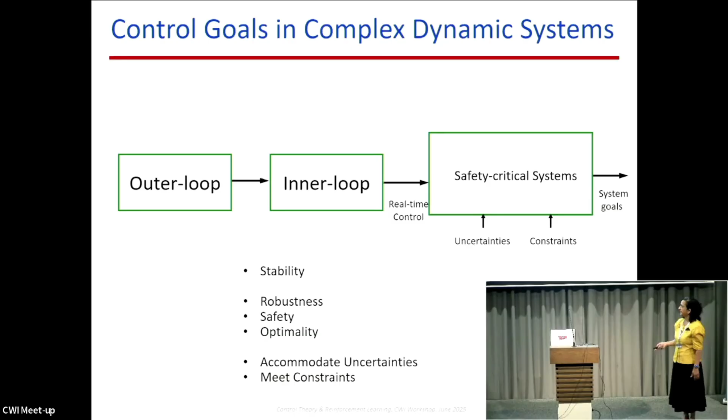You have to really stay within certain limits. The temperature cannot exceed a certain value. The current cannot go beyond a certain value, et cetera, et cetera. And this has a very long history. In fact, we can trace it all the way to the water clocks of the Greeks and the Chinese.

And in fact, I heard a talk recently about how James Watt basically was fundamentally responsible for the Industrial Revolution. And it so happened that some key individuals met. And because of that confluence came this engineering marvel, which is a substrate for all of the power grids, the electricity that you and I get. And so he, again, designed one of the first feedback control systems that sort of sets the stage for having this become a systematic engineering discipline.

And since then, there has been a whole bunch of applications, aerospace, process control, to just name a few. And these are some of the success stories that we put together in this report, not just physical systems, but cyber physical systems, meaning that there is more and more of a need to monitor these things, sense them, communicate the information through a variety of communication layers and devices, and of course, do the computation as quickly as possible and actuate it so that you can indeed design the real-time control. So it's really a nexus of the cyber and the physical worlds.

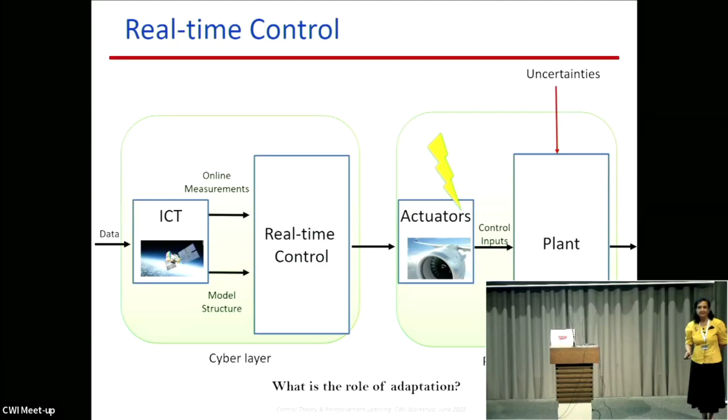So the basics of this basically is all about provably correct algorithms. And what are you trying to learn? So something went wrong, right? So that's what I'm calling as a parameter. And this is where some of the elements, you can probably see when you parameterize a Q-learning using neural networks, the weights could be these parameters.

So these parameters, but here, in the context of what I'm talking about, this theta is a physical quantity. Like, for instance, what's the effectiveness of what the actuators provide to an airplane that allows the airplane to turn, to maneuver. So if that is something that is uncertain because you've got some kind of a loss of effectiveness in the actuator, then that's what you're trying to learn in real time. But at the same time, you're also trying to figure out how to deflect those surfaces in a way so that you're able to improve the performance.

So that really is what adaptive control is trying to do. It's trying to learn, and don't worry about the details of why it is specified as a differential equation. It's just for analytical tractability. And how do you design the control input, which could be, for instance, a force or a torque or a heat and all that, like I mentioned to you. And how do you do these things with some sort of guarantees? That really is what adaptive control is all about. And adaptive control, too, just like control systems, has a history of more than 60, 70 years.

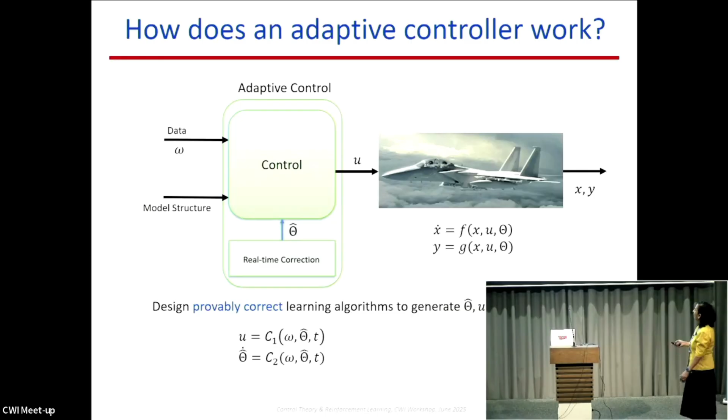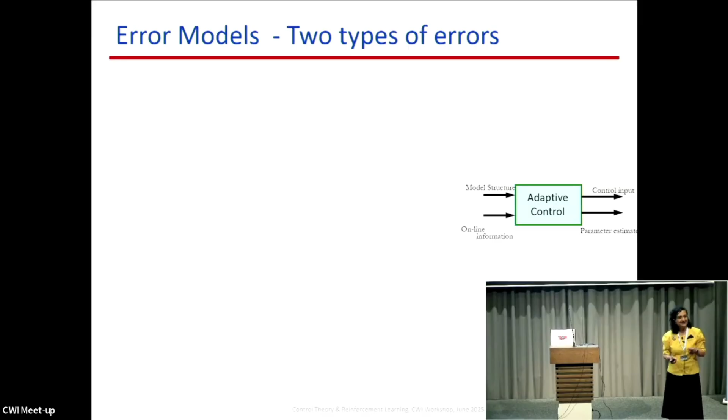So in all of these things, and here is where maybe there are more parallels that begin to emerge between RL and adaptive control, there are two kinds of errors that we always contend with. One is like, for instance, a loss function type of thing. And that is what we call in here a performance error. So E squared, or some kind of a positive definite function of E. The other is where you need to be. So for instance, if you're training the weights, where the weights need to go to, minus what you have in here. So that's a parameter error. So this is what you can measure, and you need to reduce it, and this is what you can adjust, but you don't know what it should be. So this is the learning rule.

And so how do you then design the rules for adjusting the parameter so that this performance error goes to zero? So this too, you can see, brings in some parallels to the kinds of things that you worry about in the context of, say, back propagation error. So how do you determine the error model, the one that relates the parameter error to the performance error, and the rule for adjusting this parameter is really what it's all about, right?

So if you take a very simple linear regression problem, again, something that is quite familiar to you. If you take a linear neural network, that really is what it is. So let's assume that that's really your system model. So phi is basically some underlying regressor that determines the system. So with that, you build an estimator that looks like this, because you use what is known as a certainty equivalence idea. So there is a performance error and there is a parameter error. In this particular case, it turns out that the parameter error and the performance error are really related by a very simple linear regression equation.

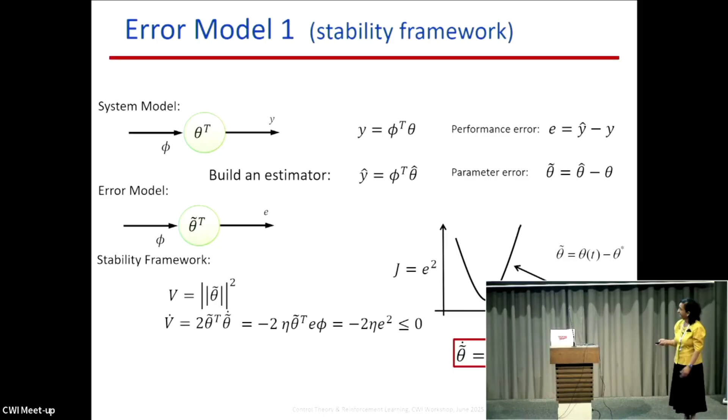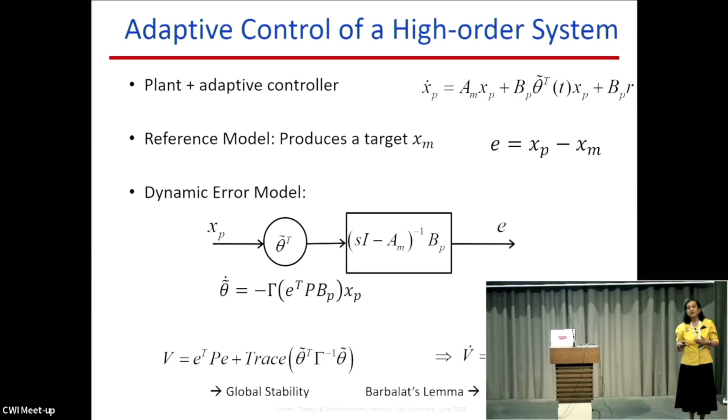So you can take the same idea now. Nothing is going to be a linear regression. Nothing is going to be in low dimensions. And so you do need to worry about the scenario where you have multiple states. All of this is essentially saying even when you increase the order of the system, you can still have a rule of how to adjust a vector of parameters. And you can still look at something like a positive definite function and show that everything is well behaved. And you can rely on some real analysis arguments of continuity, differentiability, and well-behaved norms in order to show that the error goes to 0.

And you can also look at the equivalent of POMDP. So you only have partially observable systems. For instance, there are multiple states. This is, again, a dynamic operator in here. So you have a lot of states hidden in the system, but you can only measure a part of them. So you then come up with some kind of an observer, which also doubles as a controller.

These are filters that generate these states, which end up being estimates of the actual state. And because these converge very quickly to the actual states, you're able to get a nice, stable adaptive control architecture that tells you how to go about determining an adaptive control input. I'll come to learning a little bit later.

Okay, so that again gives you stability. So you can see, as I mentioned before, the focus is on stability because when you are making these real-time changes and trying to figure out what the actual parameters are, you want to make sure that nothing runs away and you have a stable foundation, so we worry about stability.

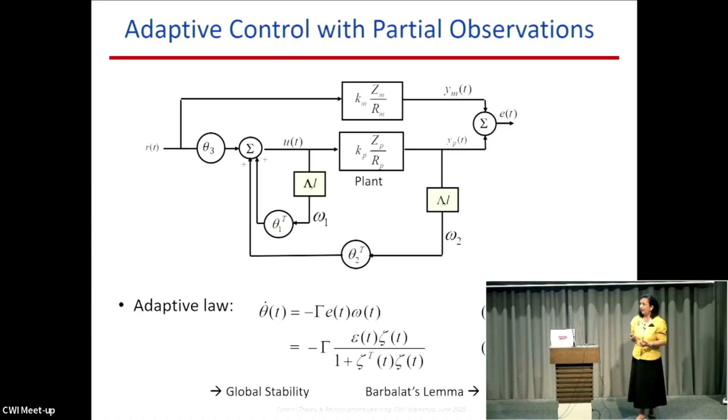The other departure, which I'm sure you have noticed here, is that the treatment of everything I'm talking about is deterministic. It's not stochastic. We haven't really brought in any kind of stochastic random components. But that doesn't mean that this is only restricted to deterministic systems. The way in which many of these models proceed is that the stochasticity is relegated to, say, measurements. So if you have measurement noise, then that brings in stochasticity. There could be disturbances, wind gusts, and so on. And that is looked at as a stochastic problem.

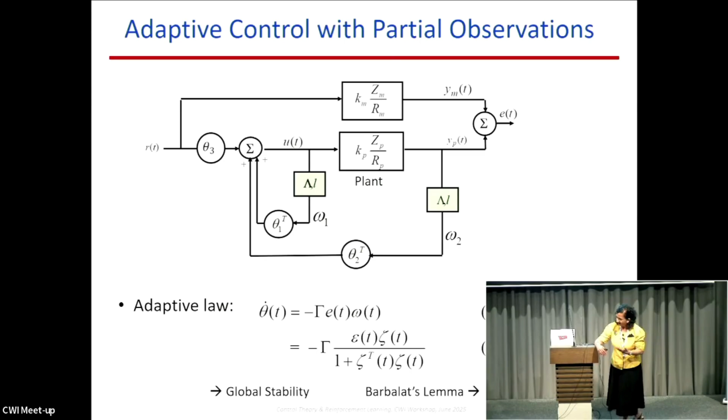And the other thing that you would have noticed is the treatment here is in continuous time, because these are analog quantities. A robot has a position and a velocity at every instant of time. The world doesn't progress in discrete chunks, so it's an analog world. And so continuous time descriptions of these systems are a more natural vehicle, and a lot of these things do proceed in continuous time. That doesn't mean that we cannot do all of these things in discrete time. There's a whole discrete time systems analysis, Lyapunov functions for discrete time, adaptive control for discrete time, all that exists, but I'm just not going into that right now. But you can infer that there are indeed many of these parallels.

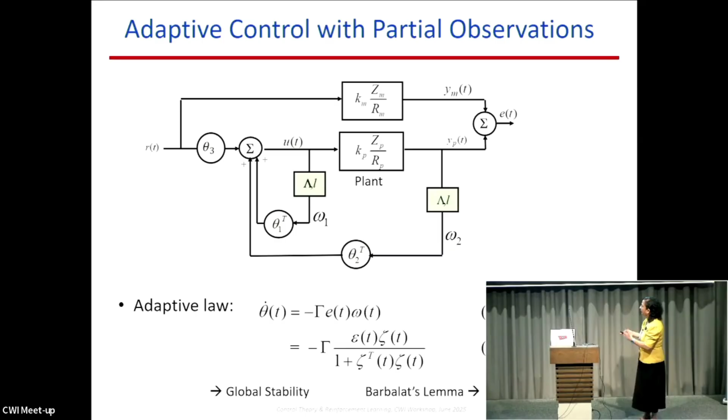Everything that I've talked about so far has looked at linear dynamic systems. Nothing in this world is linear. It's always going to be nonlinear. And so if you now have a known nonlinear system, then you can make some headway if you know something about these nonlinearities. For instance, in all of the problems, what you're looking at is a description of a physical system. Again, to come back to an airplane type of story, we know many of the underlying mechanisms that contribute to the motion of an airplane.

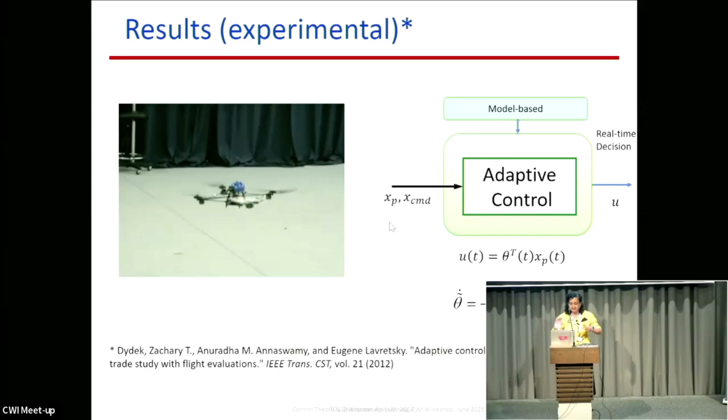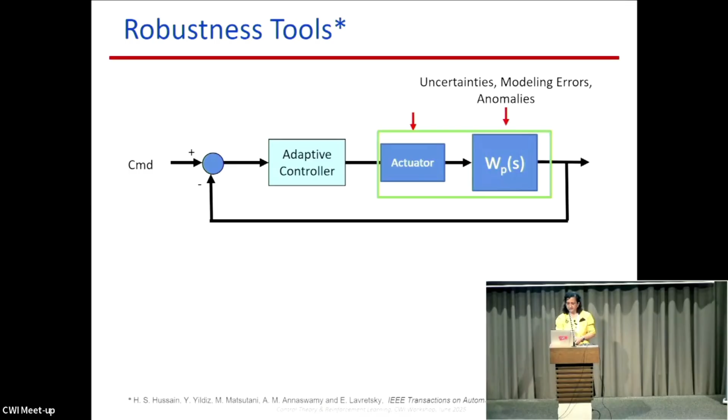So we don't really work on drones in our lab, but our goal was really trying to establish what adaptation can do. And so this was the simplest experiment that we could think of that basically emulated a real-time uncertainty in mid-flight. And that's what Zach was very clever at and was able to show that it works. So that illustrates what you can do. There's a lot more videos, but I didn't bring all of that in here. So that gives you an idea that these are hardware demonstrations of the concept.

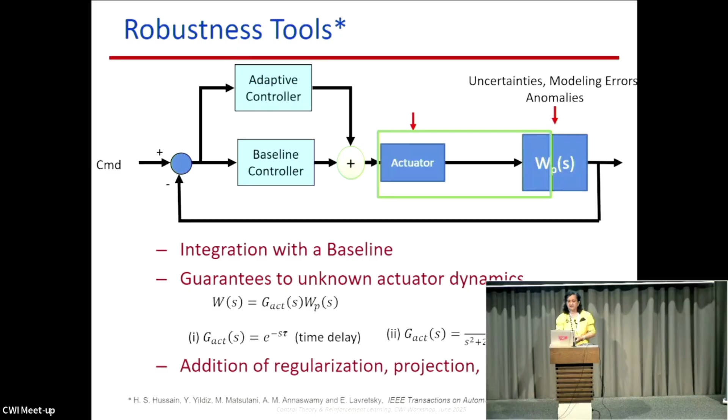So now the next thing here is that there are a lot of uncertainties beyond parametric uncertainties that can happen. And so we basically introduce other kinds of anomalies, like uncertainties in terms of not just parameters, but also input saturation uncertainties, unknown actuator dynamics, unmodeled dynamics. And in all of these cases, we can show that by using notions of regularization, which is, again, a tool that is used in RL, we can actually provide some guarantees. Projection, which is, again, a notion which is a commonality.

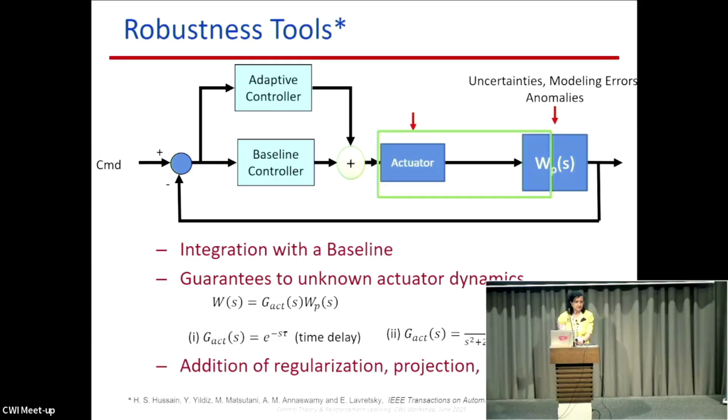Sometimes we also look at the notion of a dead zone, which is that when you are uncertain and when your magnitudes are of an insufficient quantity, you don't know whether it's due to noise or due to actual data, so don't even do any kind of adaptation. So that's the dead zone idea.

So we want to also look at another kind of constraint, another kind of property that's always present in a dynamic system, and that is input saturation. So you have a limit on the control authority as to how much force you can put in, how much torque, et cetera. And so we wanted to make sure that indeed we can carry out our adaptation even when there is input saturation.

And so what we did was to really show that in many cases, you can model the effect of saturation as an additive disturbance. And by modifying the performance error suitably, we were able to show that indeed we can accommodate. And it really started with Karason, who came up with some of the main algorithms. And subsequently, we have developed it and implemented it in practice in a variety of applications. And it actually has worked very well. So here is one example.

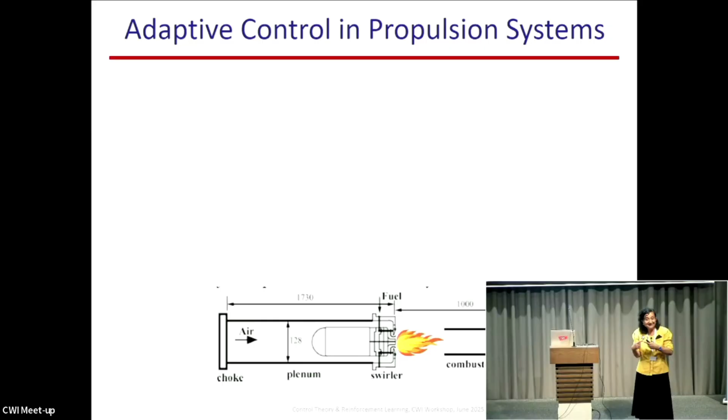So this is a problem in a gas turbine system where there is interaction between heat that is coming from the fuel that you're mixing with air and burning. And that chemical energy transforms into this huge mechanical energy, and that's what goes into the turbine and gives you thrust. But interestingly enough, the heat that's coming from the chemical reaction, from the reactant to the product, and the acoustics that are in the chamber get coupled. And when that happens, there is a huge acoustic resonance.

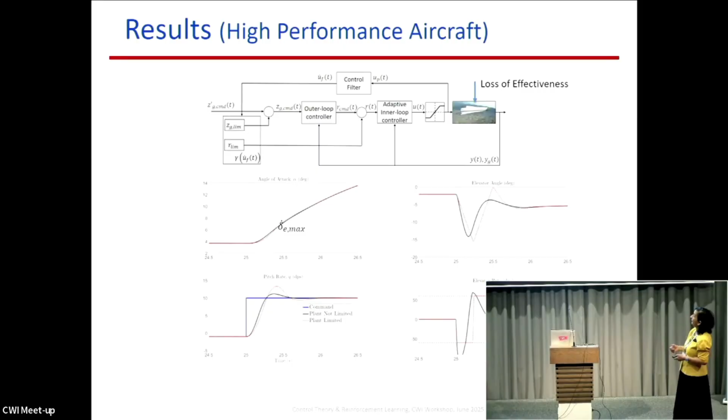Here's another example. This is simulation, but of a hypersonic vehicle. And here, we were not only worried about magnitude saturation, but we were also worried about rates, like how quickly you can actually increase this. So it turns out that if you want to really follow this particular command, you have to have a huge amount of rate, which is really not realistic. So the algorithm that we designed with all of these different kinds of processing of components was able to limit the rate, but still realize the performance, which is reasonable.

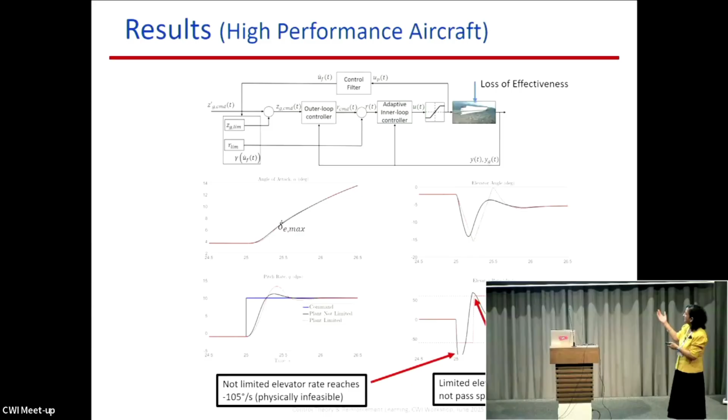So yes, there is some departure from the performance, but eventually you're able to follow the command. But the black is simply not realistic, and what we were able to do is to come pretty close to what we're trying to do. I think this is also one of the questions that I was asking you yesterday about multiple objectives. If you have this significant trade-off, you want to have the best of both worlds, and this is the one that enables you to realize that.

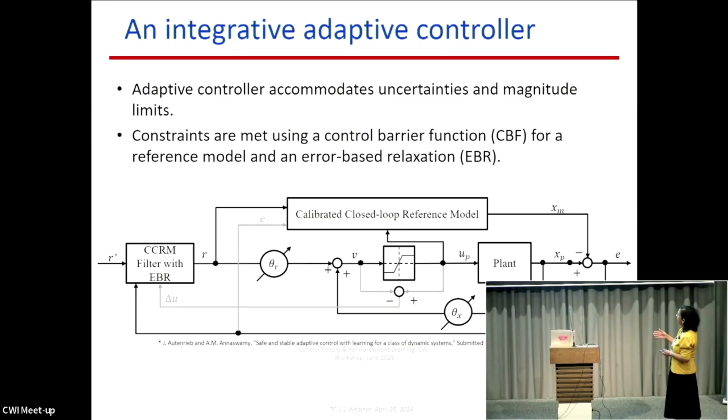Yet another type of constraint comes from safety. So not only do you want to make sure that you have the inputs subject to some constraints, but you also want the states to remain within a certain region. And how do you make sure that you can combine whatever you're trying to do in terms of performance and safety? So this is the next set of things that I want to show you. This is in collaboration with people in DLR in Germany. And so here is a very simple example.

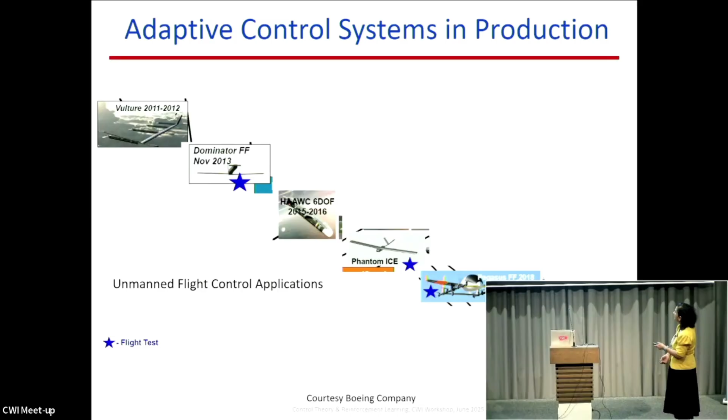So that's the idea behind it. There's a lot of details that go into it. I'm not going into the technical details, but I just want to give you an idea of the different kinds of constraints that we look at in real-time control. And many of these concepts actually have gone into production. These are things at Boeing where there were a number of flight tests. The ones with the star show the flight tests. These are all different high performance platforms, all uncrewed flight control applications where in every one of them you're after improved performance and reliability.

So that's that. I know it seems like a lot, but I'm going to go through them quickly. I just want to actually bring in one point about parameter learning and maybe go quickly to the last point and skip the things in the middle. So all of this has to do with performance. So the question is, what are we learning? After all, it's all about what went wrong, right?

So the first thing that we do is to make sure that our foundation is safe. And then we make sure that with hindsight, we can say, OK, what happened? How did the plant actually change? So when that blade broke, how much of it did break? Because I didn't worry about all that when I designed the controller, right? I just made sure that it hovers, it stays safe.

So the idea behind learning is basically to learn the unknown parameter. So it's all about making the parameter estimate go towards the true value. So that is the learning part that we focus on in the context of adaptive control. And the reason why we do that is because any small change in the parameter really results in a large change in the state space. And so real-time decision is important, but beyond that, you also want to learn what went wrong,

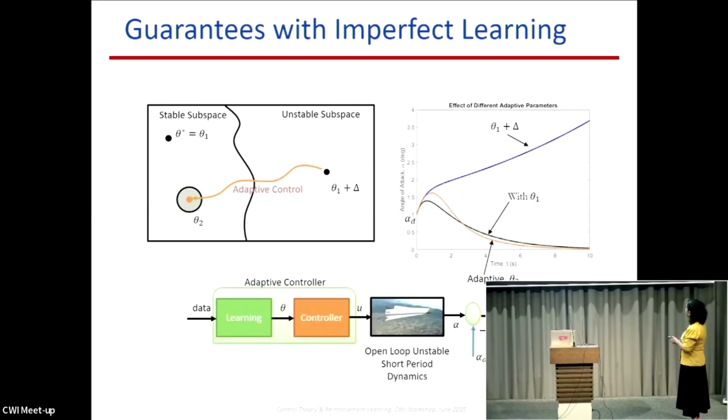So imperfect learning has to do with reaching a value which is basically in the same stable subspace. And so even if the parameters might be different, your performance goal is reached, right? So imperfect learning, yet safe performance. So that's an important thing to keep in mind. And so this is really what we strive for in adaptation before we go to learning.

And it turns out that you can also show that when you have imperfect learning and your data continues to change, every time the data changes, there is a relearning that happens. And this is what is known as bursting. And this bursting can sometimes be deleterious depending upon how safety critical your system is. Whereas with exploration, with persistent excitation, the same system never shows any burst because the loss function has gone to 0. And the main reason is that you fully learn. You don't always have the luxury of making sure that this happens, though it is better to have because it gives you a lot of robustness. So something to keep in mind.

Okay. So let me maybe skip some of these things and just directly go in here. So this is one of the things where we try to bring the two things together of neural networks and adaptive control.

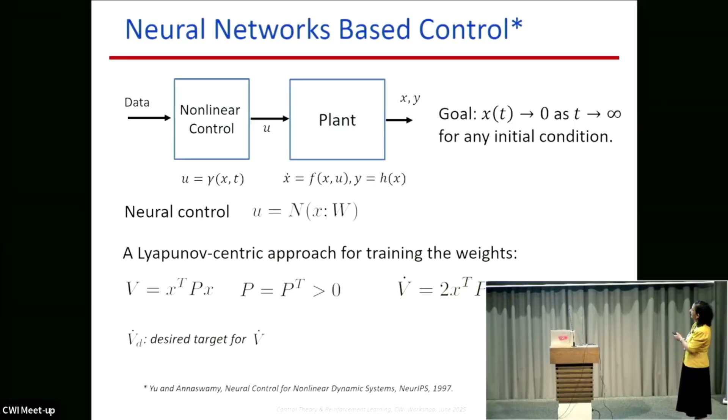So here we looked at a plant where the idea is that it's nonlinear. So we don't often know what the nonlinear control is, and we try to learn that using a neural network. But we used a Lyapunov-centric approach for training the weights. And that basically looked at a candidate function that is positive definite, trying to impose a particular target, and used the difference between the two as a training procedure.

And with that, we were able to take a very complex nonlinear system where it's impossible to figure out what the control input should be by inspection. And it does much better compared to a linear controller, with analytical guarantees.

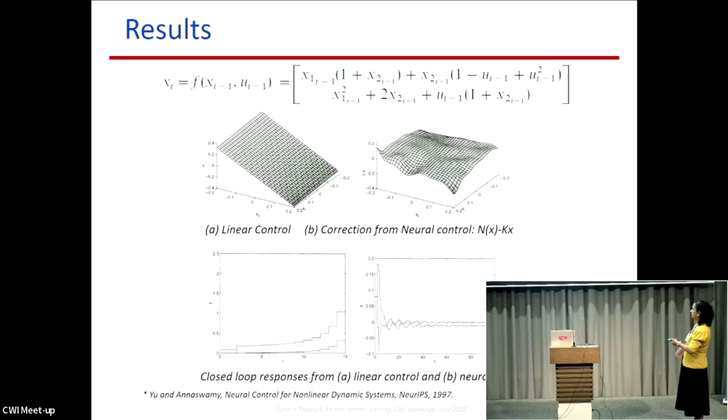And it's very similar to the kind of thing that actually Andreas has done, where there are policies, which is actually 20 years later after our work, where you can indeed combine both of them together and show that when you design your training set in a way so that it intersects with the Lyapunov function level sets, you can guarantee that everything works. But this basically shows that there is a way to combine the two and provide a provably correct architecture.

Do I have some more time?

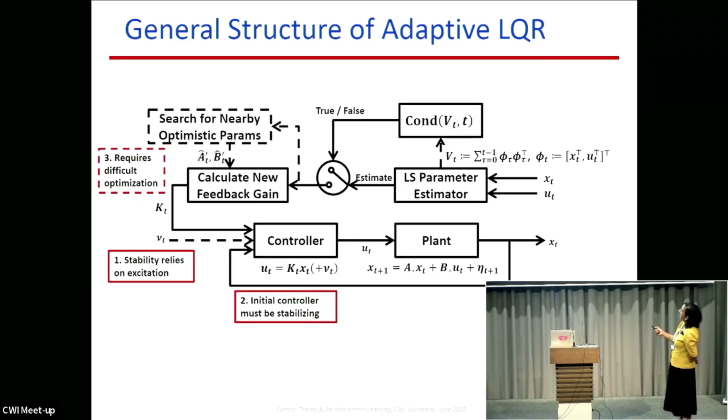So in order to really address these problems of stability relying on excitation, initial controller, and requiring difficult optimization, we develop an algorithm that does not require any of them. And here, what we do is to use a direct approach. The direct approach basically has these gains, KT and GT, and what this allows you to do is, instead of estimating the plant parameters, you directly estimate the control parameters.

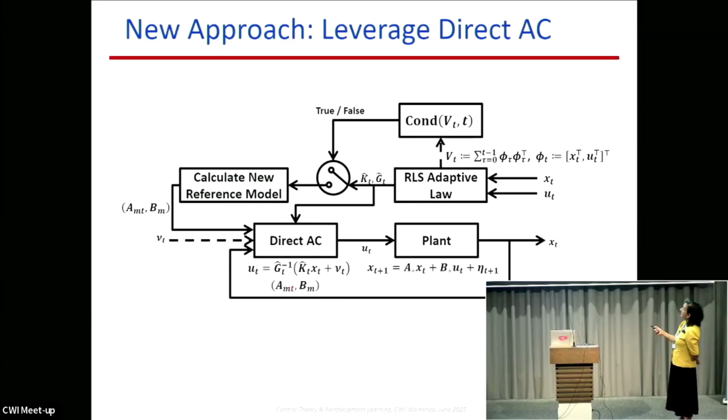And that information then is used in order to calculate the new ground truth, which is sort of a better model of the degraded system, if you will. And then you use that in order to really control the system. So when we looked at this example, we were able to show that our algorithm with the Gaussian noise exploration is the green one, and it does much better. It's more optimal, and the magnitude stays smaller.

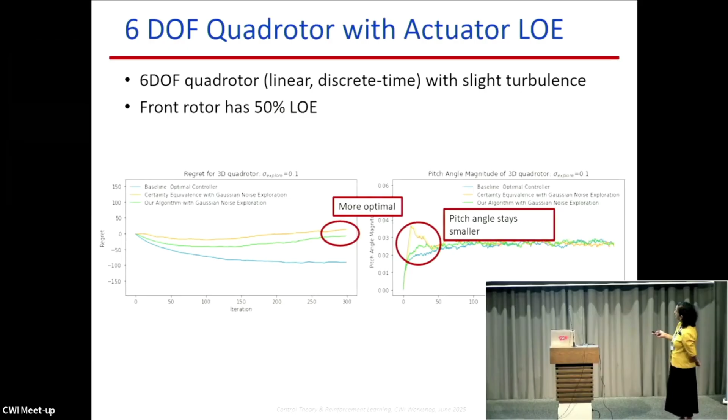And when we took that same approach and we explored the 6-DOF quadrotor, once again, our algorithm resulted in a more optimal thing in terms of regret. And the pitch angle stayed smaller, which is a good thing in terms of meeting the constraints. So that really is what I wanted to share with you.

I hope I've been able to give you an idea of how adaptive control looks at classes of problems where many of the tools are very similar, and we are able to actually exploit the synergy between AC and RL, given that RL has a very structured and powerful way of dealing with collecting information offline and figuring out ways of optimizing things when you have a very unstructured cost function. And we were able to leverage those things and combine the two, and that's what we were able to do in both of these examples.

So the kinds of things that we're working on right now is to really move towards ways in which you can have inner loop decisions with outer loop kind of management of where you want to be, so that we can anticipate what's needed. So these are control barrier functions that give you a way of staying within a certain bound so that you don't have the propensity to violate some important state constraints. So how do you make sure that all of these things happen?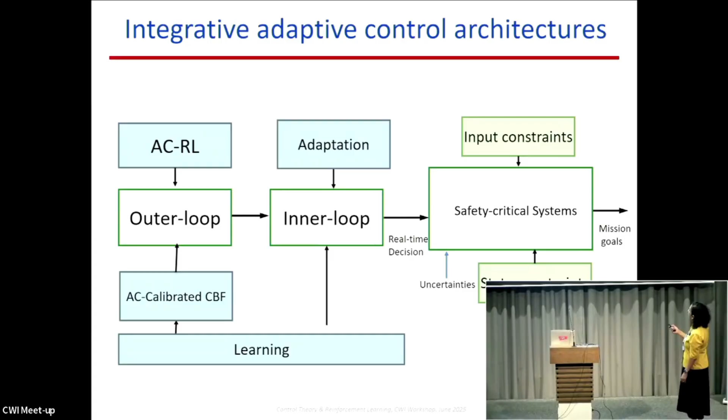And even while you're designing the inner loop, can we take this whole triumvirate of control, learning, and optimality and squeeze that time frame so that you can do everything fairly quickly and you become optimal as quickly as possible, even in the presence of uncertainties. So the takeaways here are that when you're trying to do real-time control, adaptation becomes important. You don't always have the luxury of making sure that there is exploration. And so guarantees with imperfect learning become essential in a safety-critical system, and learning comes with hindsight.

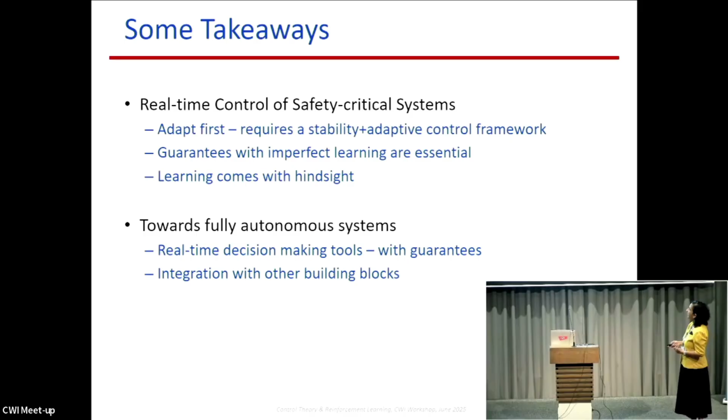And so in order to design a fully autonomous system, which is the holy grail in many engineering problems, we really need these real-time decision-making tools where there's integration with a lot of building blocks, including RL and other outer loop designs. So in many of these things, it's not always learning for control, and sometimes it is control for learning, and that needs to be addressed, especially when you're trying to do decision-making under fast timescales.

Yeah, thank you. Really nice talk. So I was wondering, a lot of the examples were on this quad where suddenly a blade falls off, right? Sorry, say that again. So the examples that you showed were based on this quad where suddenly a blade falls off, right? So it seems to me that this is like a discrete change, right?

Yeah. But the analysis that you presented, except for the last part, is based on Lyapunov functions and continuity and equilibria and so on, which is a local notion. So in a way, from an outsider's perspective, I see kind of a gap between the mathematical tool and the problem that you look at. Do you think there is some potential for switching or so on?